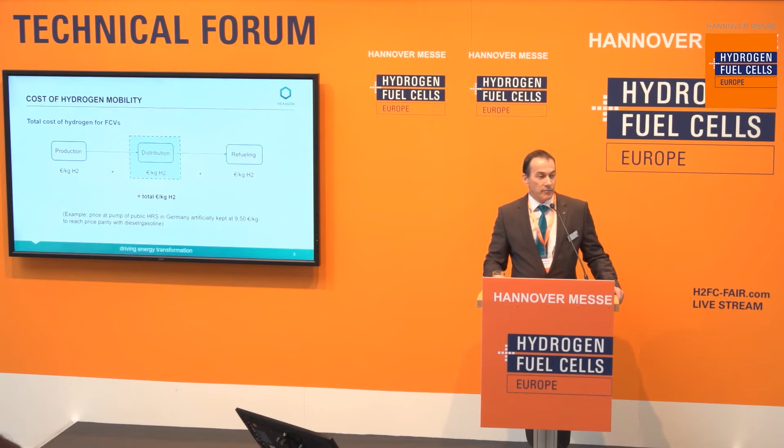If we look at the cost for the vehicle user, it is built up of three major blocks: the cost of production, the cost of distribution, and the cost of refueling. This gives the total cost. This is only the cost, don't confuse it with the price.

Here in Germany right now, the price is kept artificially at €9.50 per kilogram. If you make the backward calculation, what does it mean in terms of cost? To be profitable, you should have a cost of maybe 7.50. However, in the area of buses, you should even go lower.

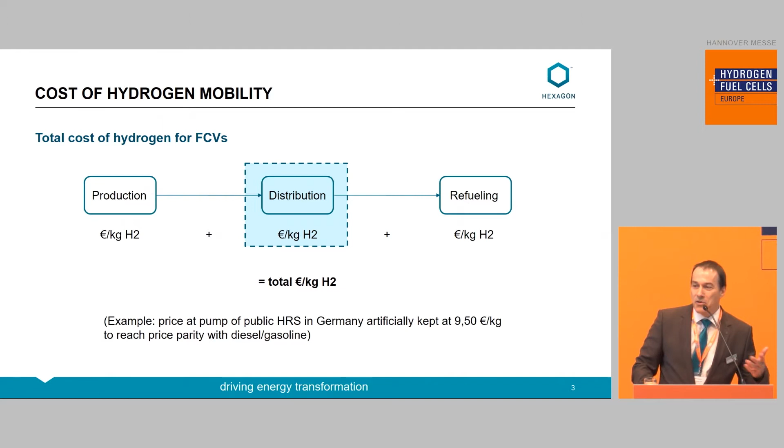There are different ways of distributing hydrogen from the production site to the refueling station. Established and widespread ways are in compressed form or in cryogenic tankers as liquid. Then there are other alternatives like pipeline, or chemically bound to either a liquid or solid carrier. And then there are others.

Of course, we from Hexagon design and manufacture composite high-pressure Type 4 vessels and systems, and also distribution systems. So we have a high interest in improving the competitiveness of compressed hydrogen, because all these technologies compete with each other.

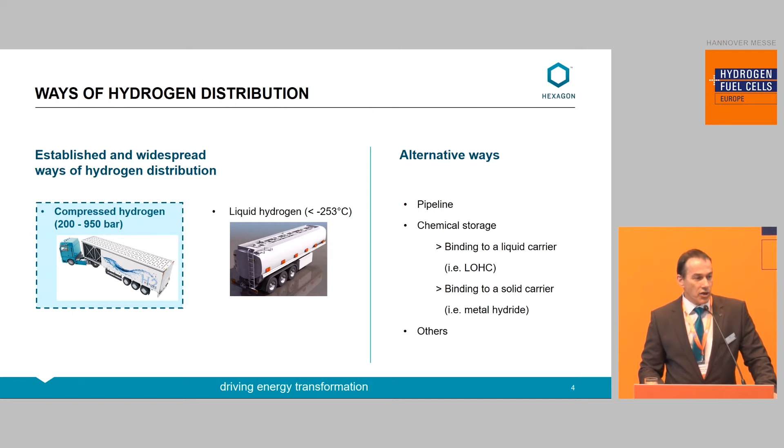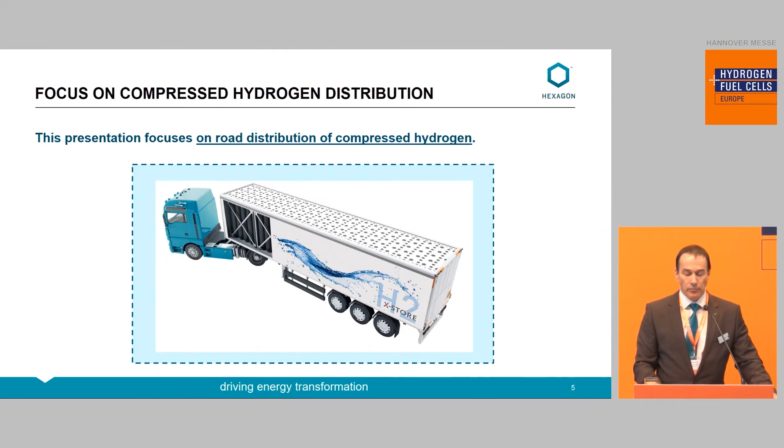Therefore, this presentation focuses on the road distribution of compressed hydrogen. Compressed hydrogen has been distributed for decades. It's not something that we have invented. And it is distributed in the industrial gas segment.

There's a huge demand for hydrogen in the industrial gas area, and predominantly Type 1 steel tube trailers are used. In 2014, however, we, together with a partner company, were pioneers in bringing the first Type 4 full composite lightweight distribution system into the market. Since then, 30 of these X-Store systems, that's our brand, are in operation for compressed hydrogen.

If you compare the two technologies, there are significant differences. Steel usually has lower operating pressure, 200, maybe 250 bar. It is heavy and has a limited payload because they reach the maximum gross vehicle weight immediately. Usually they are also available in just one length, so there's no flexibility in sizes. There are no short tube trailers available.

But the big advantage is they have a low purchasing price. But given the low payload, they have high operational costs because they have to drive a lot to deliver the same amount of gas.

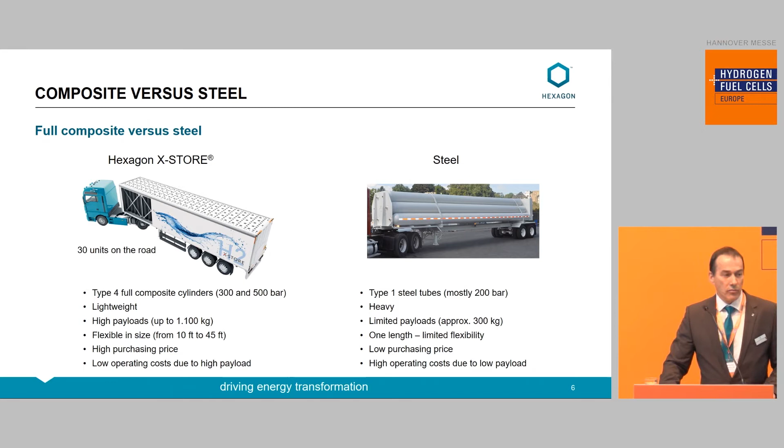Now, with this, I built a case study. The goal of the case study is to make a TCO calculation, total cost of ownership, and also a calculation of the cost of the distributed hydrogen. I also compare a composite with a steel system.

If you want to do a TCO calculation of a distribution system, you have to take into consideration three major components: the tractor that pulls the whole thing, the distribution system itself, and the trailer chassis that is underneath. Sometimes the distribution system and the chassis form one integral unit.

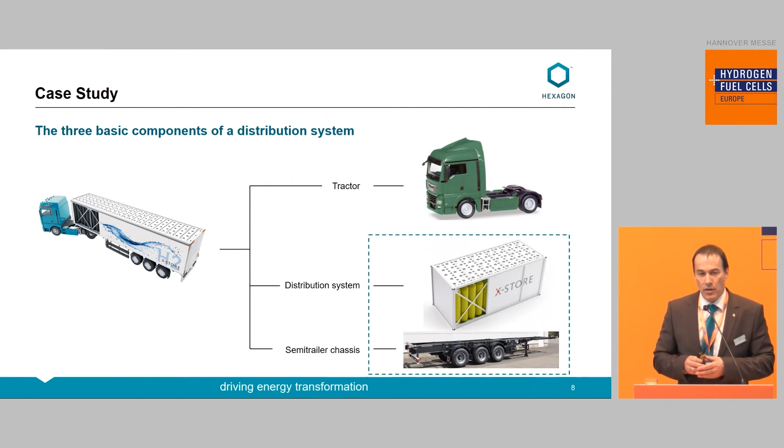This is called a battery vehicle in Europe. And the opposite is the containerized solution.

You need the following input for a thorough and complete total cost of ownership calculation. You have the equipment-related input, which is the price, of course. You need the depreciation time of the equipment, which is different from country to country. And then you have all the OPEX-related input, like driver's cost, fuel cost, wear and tear, repairs, insurance, and also very important, mandatory periodical inspection.

This is very important for the distribution system itself. And then for any specific case, you need general input data for your calculation. For example, you need the distance between the production site and the refueling station, and the demand at the refueling station.

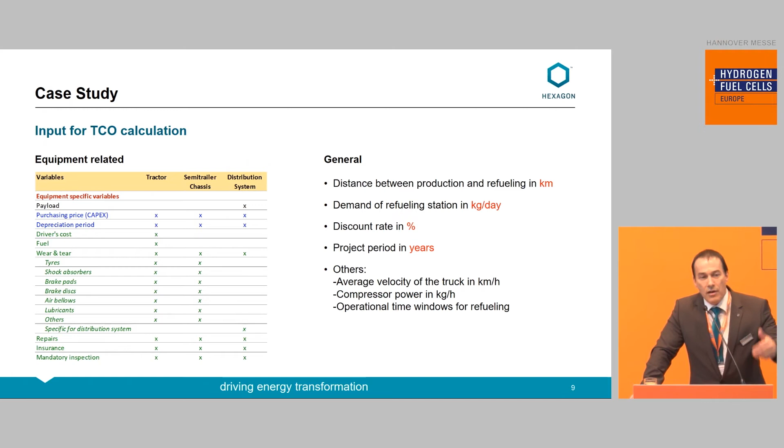You also need a discount rate, because for the TCO we use a net present value calculation. The project horizon is also important, how many years you are looking at. And then there are others, like the concept of the refueling station, the average velocity, and so on.

So with this, you can build a TCO calculation. Real life usually looks pretty complex. In the future, we assume that you will have centralized production hubs.

And from those production hubs, several refueling stations are served. However, they all differ in distance and demand and even in concept. They can be private or they can be public. This is too complex to build a case study right now in this presentation.

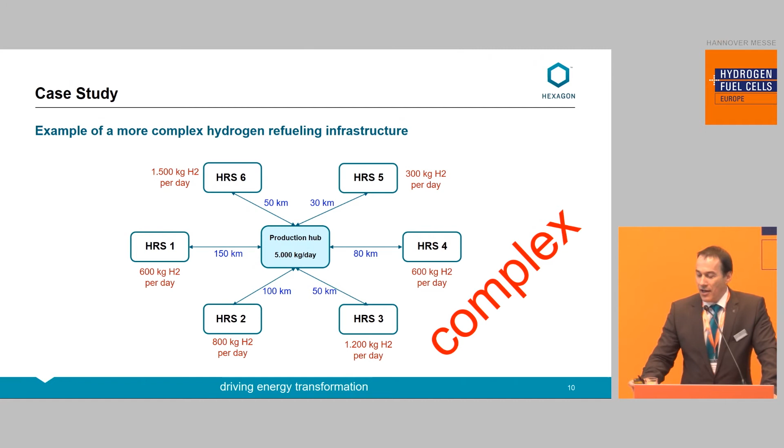Therefore, I made a simplified base case. We have the production hub, we look at one refueling station. I chose these average values: 100 kilometers of distance and 500 kilograms in demand. The 500 kilograms correspond to roughly 100 passenger cars per day. Or if you think of a bus station, we are talking about 20 to 25 buses per day.

So it's pretty realistic. And then we have the general input data for this base case: 30 years project lifetime, 10 years of depreciation, then 7% for the discount rate.

And then we use, for the sake of simplicity, a tractor cost of 1.40 euros per kilometer, and for the chassis 0.1, which gives a total of 1.5.

This is a worst case at the same time. Why is it a worst case? Because here you have a dedicated tractor for the distribution system, which normally you don't have. In reality, you usually have tractors shared by different distribution systems.

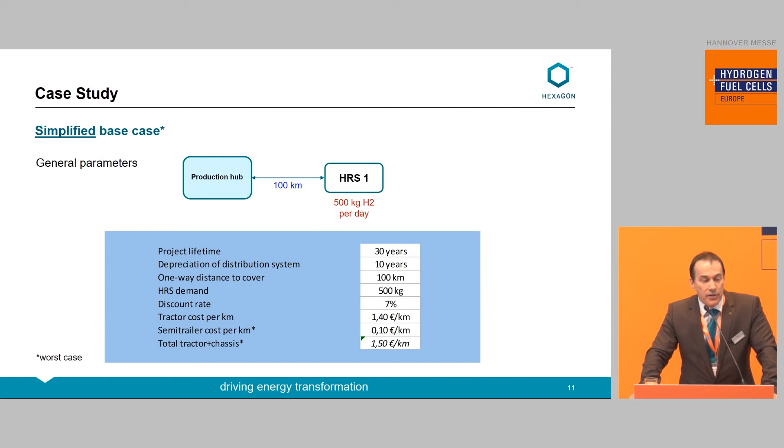And then we have the equipment-related input, and here I compare the two systems, the X-Store composite system and the steel system. So they differ here in the price, as you can see: 600,000 on one side, 200,000 on the other side.

We have 900 kilograms of usable hydrogen, assuming they return pretty empty, 10 bar inside — that's an assumption. And we have 300 kilos on the other side.

And then we also fairly estimated the inspection and maintenance costs that we have over the lifetime.

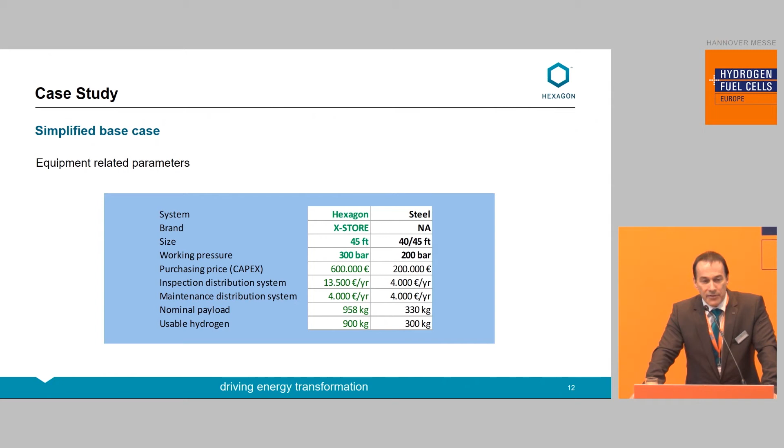And this is now the result of the total cost of ownership. The green curve is the total cost of ownership at any year within 30 years for the composite system, and the black one is for the steel. So you see a huge gap.

And of course, the longer the time horizon is, the bigger the gap gets, or the advantage of the composite system.

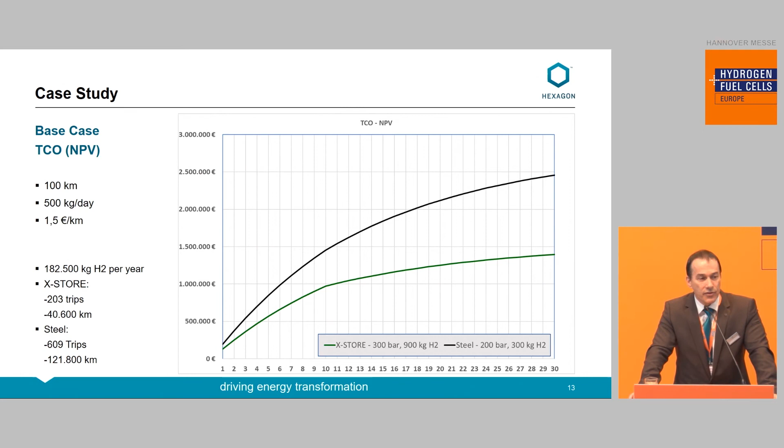So this is now one case study, the base case. What I did now was I took this model and changed values, so I created different data sets.

And I changed those values that probably have the biggest impact here, which is the distance and the demand at the refueling station. And then I created a graph.

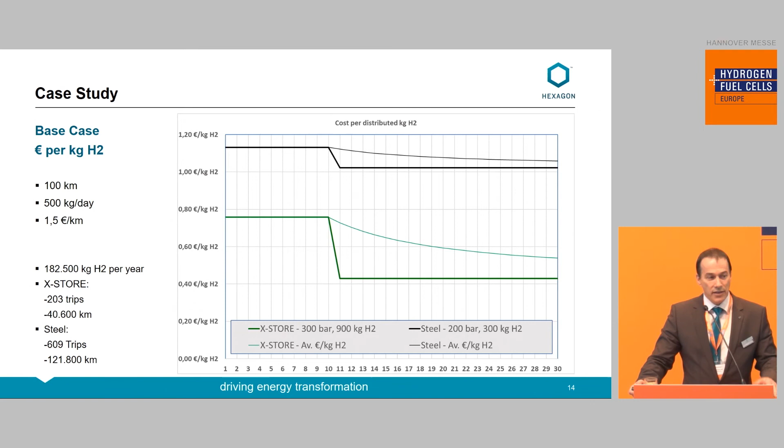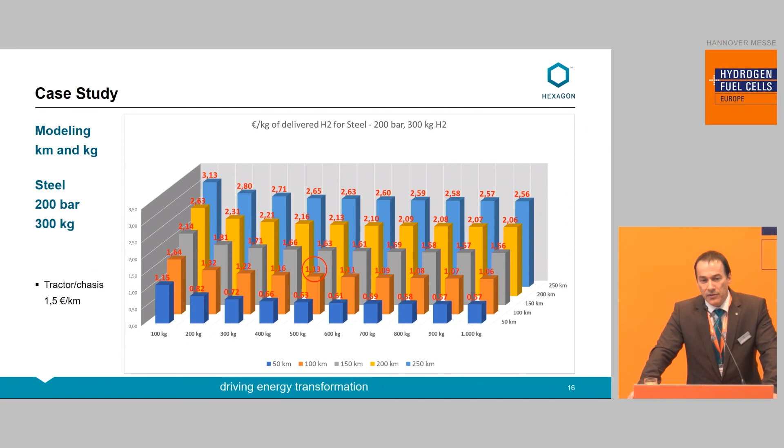This is the graph for the steel unit. You see higher values. Also in the red circle, the value for the base case is 1.13, roughly 50% above the composite value. And finally, I made a direct comparison between steel and composite.

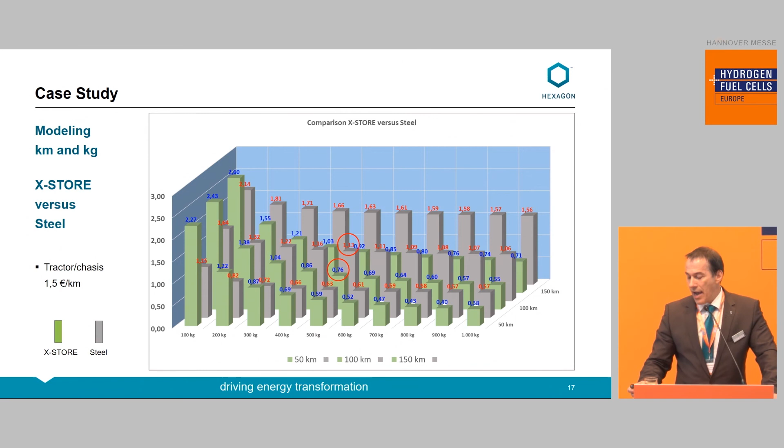It wins in total cost of ownership and cost per distributed kilogram of hydrogen. I conclude my presentation now with several statements.

Composite X-Store Type 4 distribution systems are reliable and proven in the field. They considerably reduce TCO and cost of transported hydrogen. They contribute to the success of compressed hydrogen.

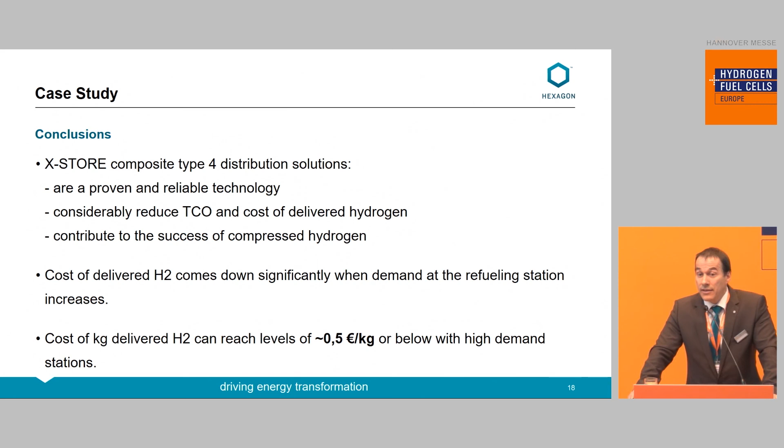And a general observation: the cost of delivered hydrogen comes down with higher demand at the station. To give you a level, we can easily reach 0.5 euro per kilogram or even below that if we only had demand that is high enough at the station.

Last sentence, what does it mean? We just need more vehicles on the road.

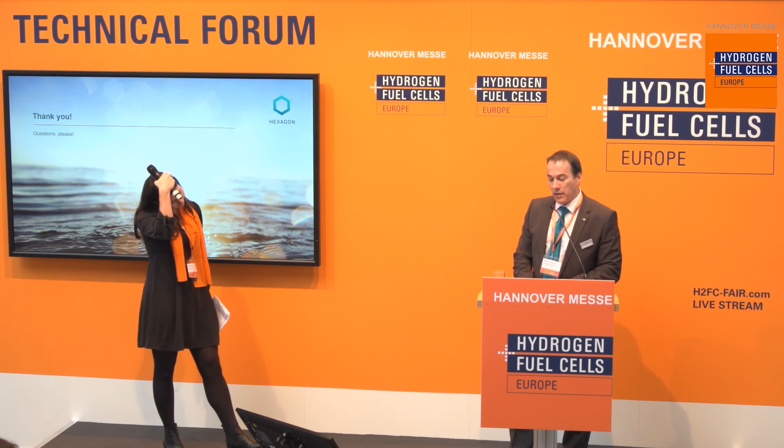Yes, correct. So the flagship today carries 1,100 kilograms nominal payload. There are initiatives now around to change the standards.

If they become reality, then maybe from 2021, at the latest 2023 on, we will have new standards in place for the distribution of hydrogen, and with the new standards we might reach a payload of 1,500 kilograms per truck.